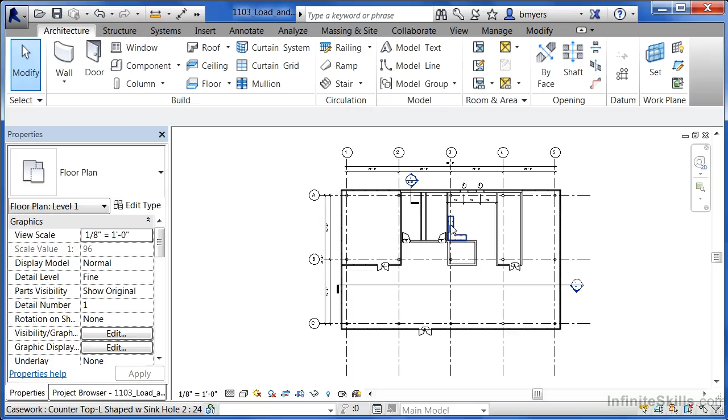In this case, we want to load in two sinks. One will go into each of our different bathroom areas, and we'll also have a kitchen sink that'll come into what will more than likely be a break room area. To begin, let's zoom in on this part of our building. Now we need to load in some of those sinks.

We can do that by coming underneath Architecture, selecting Component, moving over to Load Family, scrolling down until we see Plumbing, since these are plumbing fixtures, going into the Architectural folder, and then double-clicking Fixtures. From here, we have a variety of different component families, showers and drinking fountains, but the ones we want to load in are sinks.

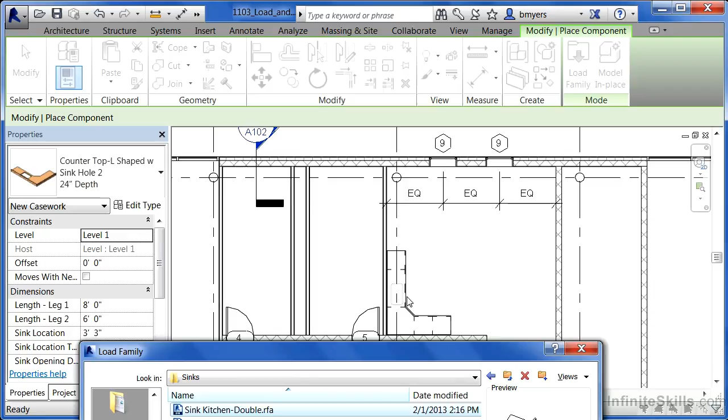So double-click on Sinks. There are two different ones that we want to load in. The first is the Sink Kitchen Double, which will fit in that break room area, right in this location. The next will be one of these down here, probably the Sink Single 2D. Let's check on it to verify that it'll work okay in this condition.

Now, the key word here is 2D—this is actually a two-dimensional sink. Let's go through the process of loading this in, and then I'll describe why we think about using a two-dimensional sink. Hold down the Control key and click on the Sink Kitchen Double. If Sink Single 2D isn't already highlighted, hold Control and click on that too. Click Open to load these in.

The reason why we might use a two-dimensional sink, as I'm looking at here in the preview underneath our properties, is that two-dimensional sinks take up a lot less space in Revit as far as file size and processing power are concerned. So if you have a lot of different kinds of objects, particularly on larger projects, putting two-dimensional components in instead of three-dimensional ones will sometimes make the model less heavy, meaning a faster project.

You'll also discover that the way it looks inside a plan view won't be any different. Whether it's a two-dimensional or three-dimensional sink, if you're looking straight down at it, you'll never be able to tell the difference between the two. So unless you absolutely need to see it in 3D, it's usually better to insert two-dimensional components. They'll schedule the same way as three-dimensional components, just because it's easier for Revit to process.

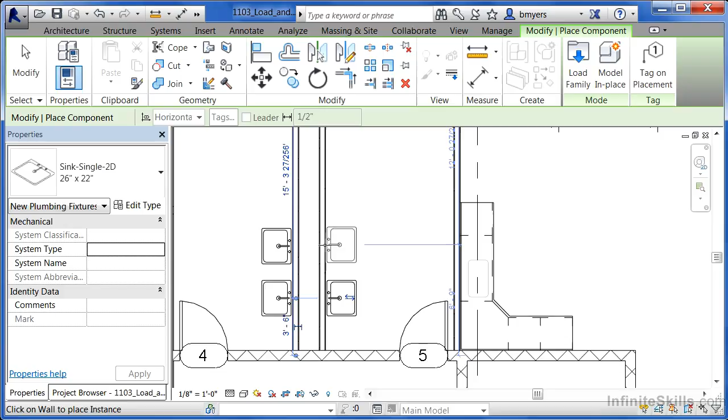So in this example, let's make sure that we use the Sink Single 2D, move in here to our restroom area, and I'm just going to put a couple of wall-mounted ones here, and a couple of wall-mounted ones over on the other side. Then hit Escape whenever you're done.

I'm going to come over here and we're going to place a sink into this sink hole. Now, I do have a little minor design issue here that I don't like. I'm looking at this countertop and I'm seeing a hole right here, and it's not centered on the casework underneath.

So I'm going to select on the countertop first. Depending on the countertop, in some conditions you might have arrows that would allow you to drag the hole over to the right location. But since this does not have the arrows associated with this opening, we need to look underneath the properties of this particular countertop to move it over.

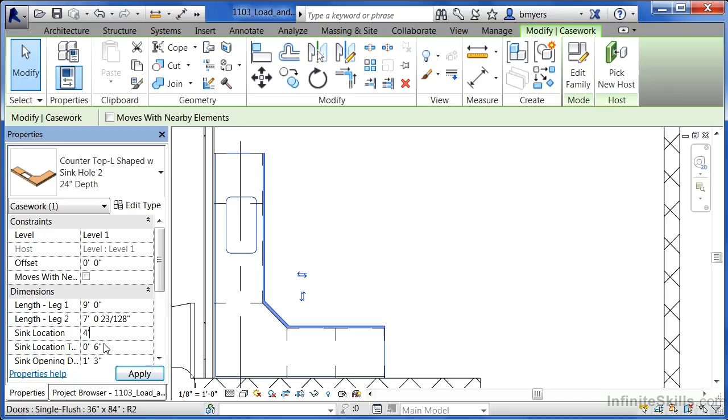Here I can see that the sink location is 3'3". Change that to be 5 foot, and then move your mouse over into this direction. I can see that's over a little bit too far, so we're going to change this to be 4 foot now and move our mouse over in this location. And we can see that it shifted it up and then shifted it back down again, so now this is more centered inside of this cabinetry or piece of casework that's underneath.

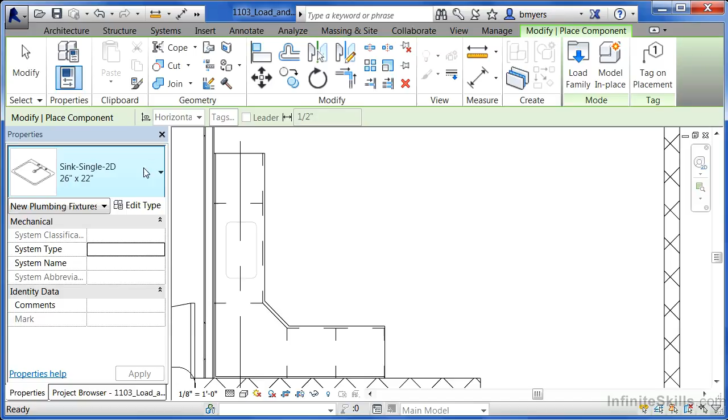Now that we've done that and we know that the hole is in the right location, let's place the sink in there. To do that, come underneath the Architecture tab again, select on Component. In this case, I don't want that 2D sink, I want the Sink Kitchen Double, which is 42 by 21. Come over in this direction. You can hit the space bar to rotate it around.

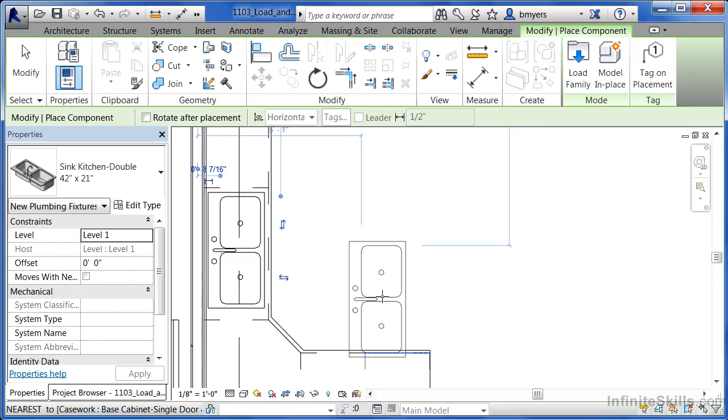And now I'm going to try to place this right in this area. I can already see that the sink hole isn't going to be big enough, but that's okay, we can adjust it after the fact. Click in order to place that right in that location. Technically, we wouldn't even need to adjust that hole for the sink if we didn't need to. The only reason why we might actually adjust it is because in this case, the hole for where the sink is going to be sitting is really only that big, and you'd only see that in a 3D view.

But let's take the time to make that adjustment. So if you select there on the countertop, I'm going to scroll down here, and I can see that there's a couple of different dimensions related to the sink opening, including the depth and the width. That's going to be the overall dimensions of this particular opening. I'm going to assume that since it's 1'3" is the depth, that's going to go from here to here, and that looks about right. So it's really the width that needs to be adjusted.

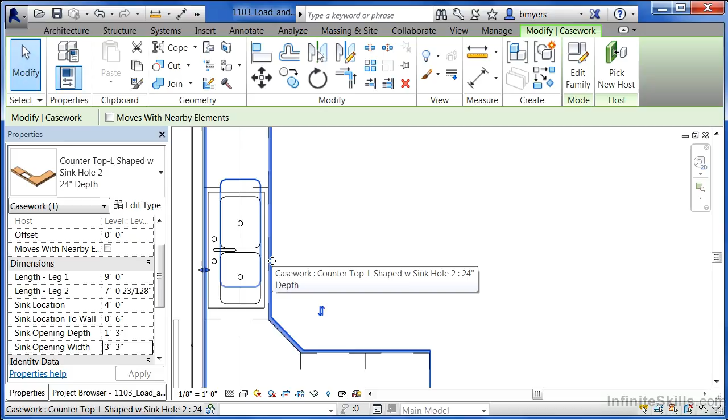Now, I'm not sure the exact width this is going to need to be, so I'm going to change this to be 3 foot just for starters and see how big that 3 foot dimension looks. It's close. I'm now going to do 3'3", take another look at it. That's just about right. The only problem now is that the hole for where the sink is at needs to now be moved down again. So once again, we're going to change the location for this, and in this case, I'll type in 3'6" just to see what the difference is. And we can see that now that opening is just perfect for where those sink basins need to go.

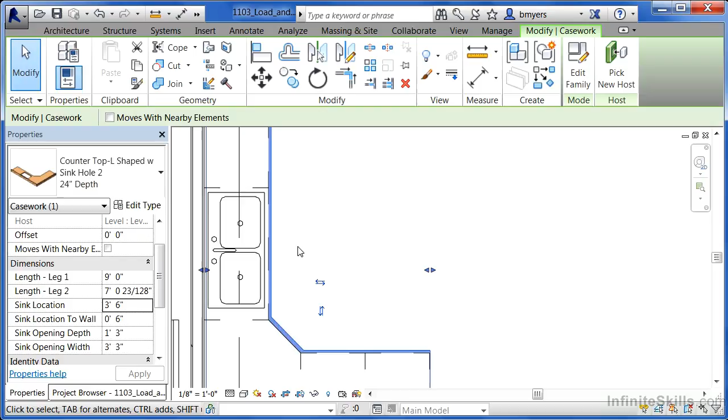This process that we just did is not just for such things as sinks. Pretty much anything that would be considered a component family would get placed in this way. There's nothing wrong with 2D if you only need to see it two-dimensional in that specific view. In the case of a plan view, if this is going to be the only spot I would ever see these sinks, then loading in two-dimensional sinks is fine because it'll show up and document appropriately. And finally, if we're going to place a three-dimensional sink into the plan, make sure to choose a three-dimensional sink, then shift it to place it in the appropriate location.